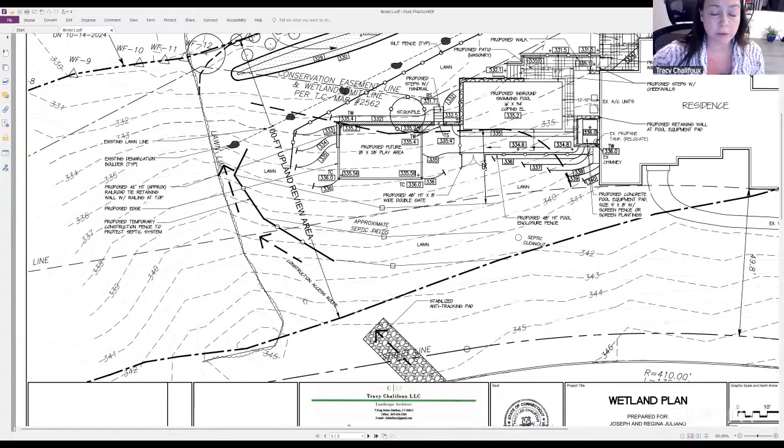The existing septic system is located here. The construction access route would be coming from the roadway along the east side of the property, avoiding the septic system and coming down and around to access the area.

There are no changes proposed to the existing driveway, the existing front walk, or the rear deck. I'd be happy to take any questions, or I could turn this over to Manny Silva if you have any engineering related questions about the stormwater management. Thank you.

Are there any questions from the commission before we go to the applicant's engineer? Through the chair. Well, go ahead, Greg. Thank you.

What do you know about what type of filtering system is going to be installed? Is there backwash? Where's the backwash go? That kind of stuff.

I actually don't have that information, but the homeowner, Mr. Juliano, may have that information, or we could get those answers to you. Yeah, we don't necessarily need it tonight, but we're going to need it resolved. Okay, thank you.

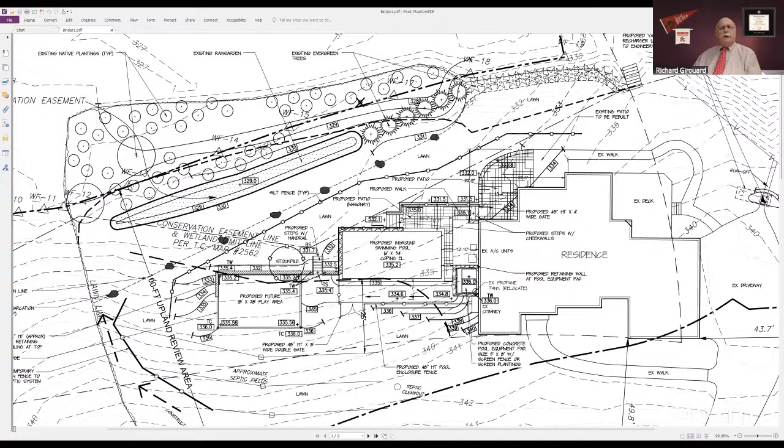All right, is there anyone else before we go to Mr. Silva? Through the chair. Go ahead, David. Is there additional planting that's going to be going in below the walls and stuff?

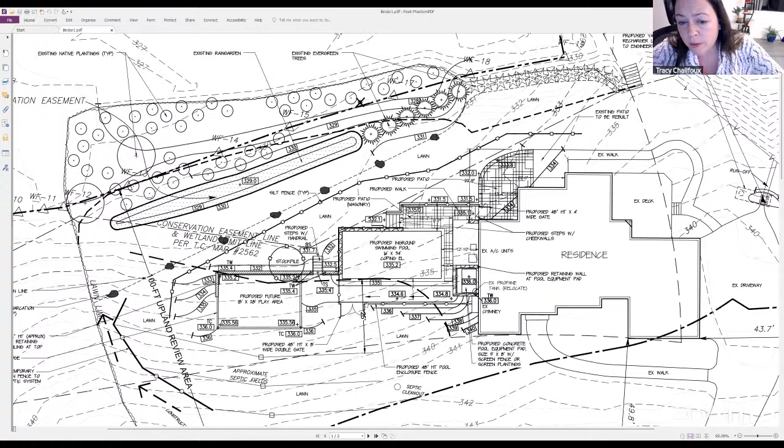There's no planting proposed on this site plan. However, I have had conversations with the homeowner about a desire for plantings surrounding the swimming pool environment. So we expect there would be a planting bed of upland or ornamental plantings, probably just below this retaining wall. We also discussed planting this northern slope to help hold the soil in place. Additionally, screen plantings between the roadway and the swimming pool environment are strongly desired by the homeowner.

Okay, we'd love to see what you have planned. Is there sufficient space for construction access around the end of the septic system? Yes, there is. In fact, this is the access that we've been utilizing throughout the wetland restoration process.

I just want to make sure that they're not going to say, oh, let's move these boulders out of the way and make life a lot easier. Yeah, there's ample space in between the boulders so they can maneuver the machinery around. Okay, thank you, thank you.

Through the chair. Go ahead, Rich. Just two things. First of all, I noticed that this application does involve a propane tank. And secondly, I wanted to know if there had been any discussion about monuments.

Didn't we discuss that in the last meeting? I guess my concern is that something's going to be changed that would change the monuments, especially considering there's a propane tank on site.

Are you talking about where the boulders are, Rich? Right. The monument—what we did there, if I'm correct, and Tracy or Mr. Silva can tell us, we asked that a 4x4 post be put there with the marker. Am I correct? That's what we asked for because there's no way to really put our markers on the boulders. Yeah, I think we were talking about 3 of them.

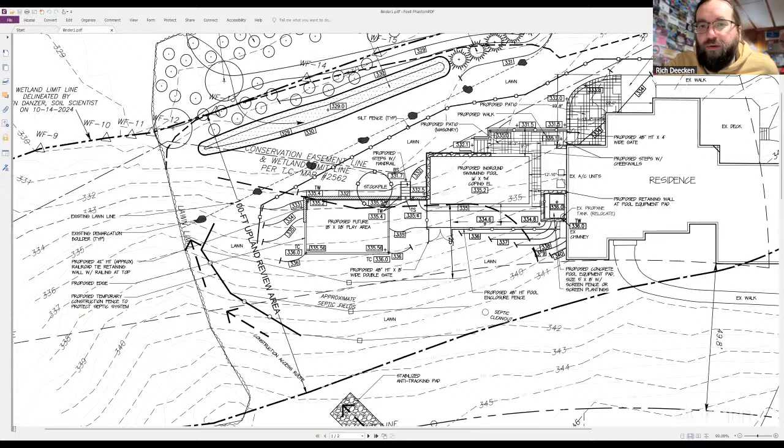Okay, because I did notice it at the bottom right corner of the home. Bottom—I think your mouse just disappeared. Oh, I'm sorry, I'm sorry, it would be the bottom left corner of the residence. I'm looking in the wrong place.

It says propane tank relocated. Sure, are they going to be putting it in that general vicinity? If we can, we'd like to keep it in this vicinity. Otherwise, we'll have to look at an alternative location.

Oh, that's great, it's completely out of the wetland. Yes, that's the intention. We do not want anything within the wetlands.

Okay, yeah, I just wanted to confirm that's where it was. That was a significant upgrade. All right, thank you.

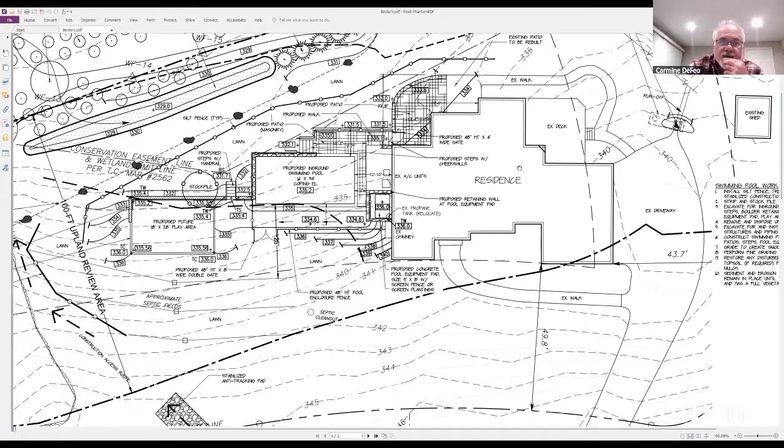Yes, please. The other question is, what drawing are you showing? The drawing I'm showing is a pool site plan dated September 19th, 2025. And the sheet number? SP1. That said, there's also an SP1 prepared by Rose Tiso that shows drainage information.

We don't have that updated. Mine is dated January 4th, 2025.

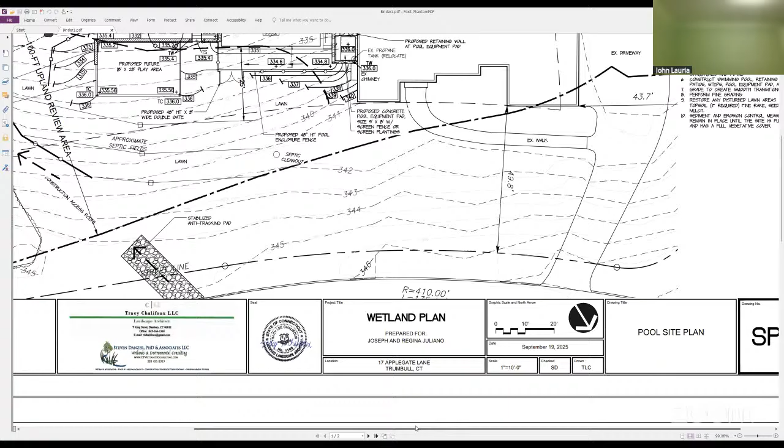I'd have to look at the submission. I'll take it back, there are some revisions. 9/23/25 is the latest revision on this. Okay, that makes sense, he's looking at the Rose Tiso plan.

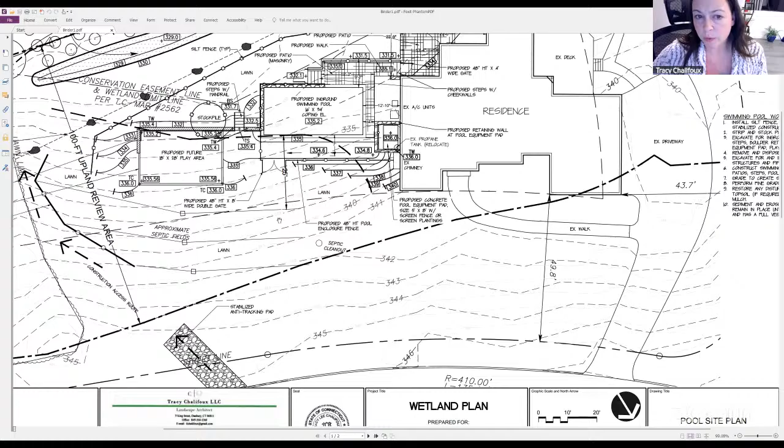So you're saying that one is the 9/23/25? Yes, I believe the Rose Tiso plan is. And that reflects this, the line work of this site plan is on the Rose Tiso plan. But the 9/23/25, if you're showing that, that's not the same drawing I have. That's correct, this is a different drawing.

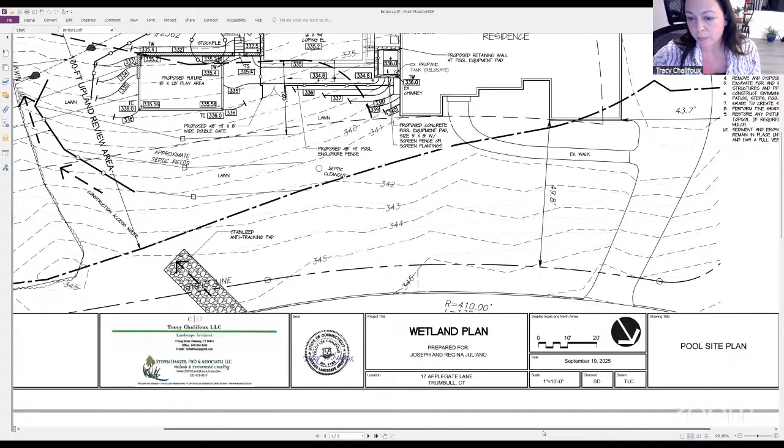This is the landscape drawing of the site plan. But you said that was SP1? Yes, they have the same sheet numbers, but one is prepared by Tracy Chalifoux LLC and the other is prepared by Rose Tiso. Well, we were not issued that pool site plan SP1. Yeah, we don't have it.

Manny Silva for the record, from Rose Tiso and Company, 35 Brentwood Avenue, Fairfield, Connecticut. The SP1 you're referencing from Rose Tiso has the pool and the play area, or at least it should. And I can bring that up if Tracy lets me bring it up.

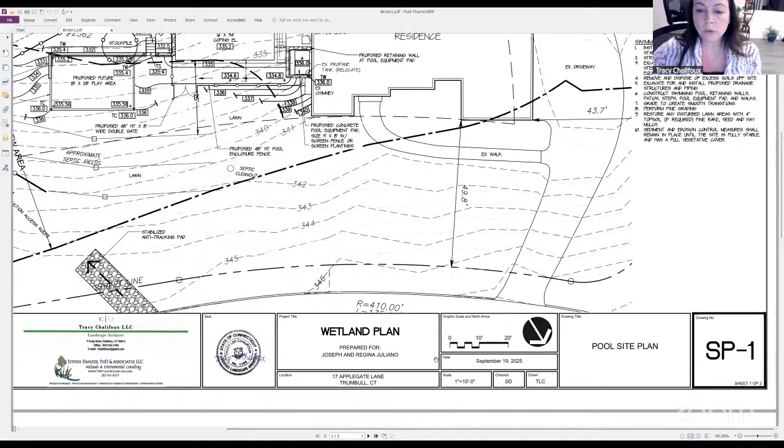Yes, and it's basically the same plan, Tracy's plan references my plan. But the SP1 I have shows a picket fence, and yours, the one that was just up, does not show a picket fence. So is the plan that you have looks like this, correct?

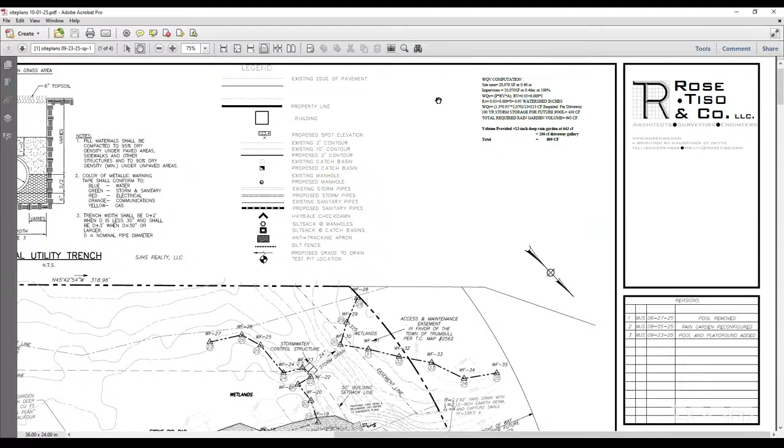It's Rose Tiso Company with the revision date. And you said there was a picket fence? Hold on, let's see. Yeah, right there to the right, behind the driveway. Right, that's an existing picket fence, it's not proposed. I think there is one there.

Okay, yep, but the drawing that she just had up, that she was referencing, did not show that, so I don't know what else is on that drawing that we can't see. Okay, what we can do is make sure that we coordinate this. I think this picket fence came up in the survey.

And that's an existing feature, but we can make sure everything is coordinated, although she should have the picket fence, maybe it's just frozen out or something. Is that correct, Tracy? That's correct, it's graphically indicated and it's in the survey, it is an existing picket fence. So the picket fence is an existing feature that hasn't changed.

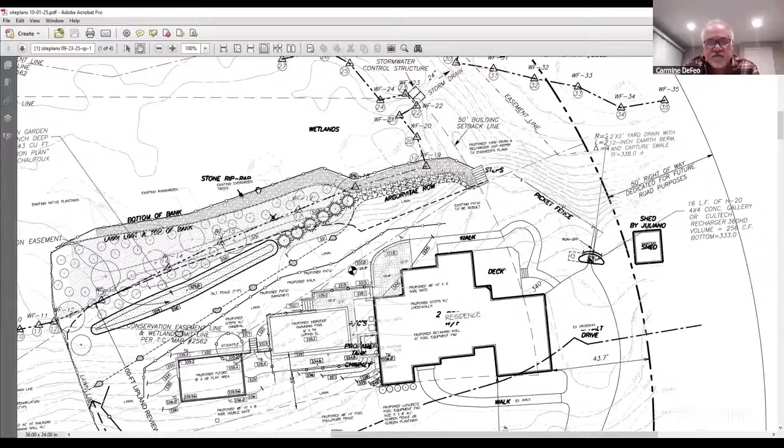I don't know if the commission would like, I could continue on with what I wanted to present. That's the only thing I've got right now, I don't know what else might be different between these drawings. You're asking us to approve something that we're looking at versus what you're presenting, that's a conflict. Tracy, can you share again and point it out if it's on your plan? Sure, thank you, because the drawings are from the same CAD base, so they should be coordinated.

Through the chair, go ahead David. Which of these plans, they're both labeled SP1, which one is the official site plan? Because one of them needs to be the official site plan. I would say Tracy's is, mine is just a support plan for the engineering piece, which is the drainage.

Right, so one of them should be labeled SP1 for the site plan, and one of them should be named something else. I don't know, maybe SE1 for site engineering, or DE or D1 for drainage one or something like that. But typically, one needs to be the site plan and one needs to be something other than that, because there should only be one official site plan.

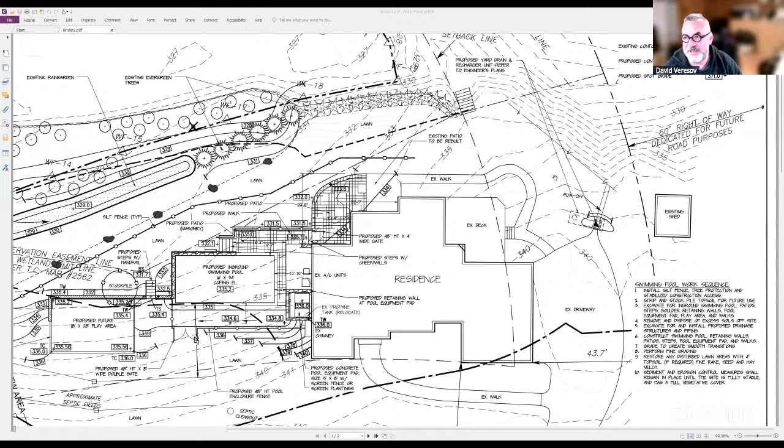Does that make sense? Yes, noted. We'll take care of that. Thank you.

Okay, if you can all see the plan, this is the picket fence here, the existing picket fence. So you can just make a notation on it that that's what it's showing? Yes, absolutely. Thank you.

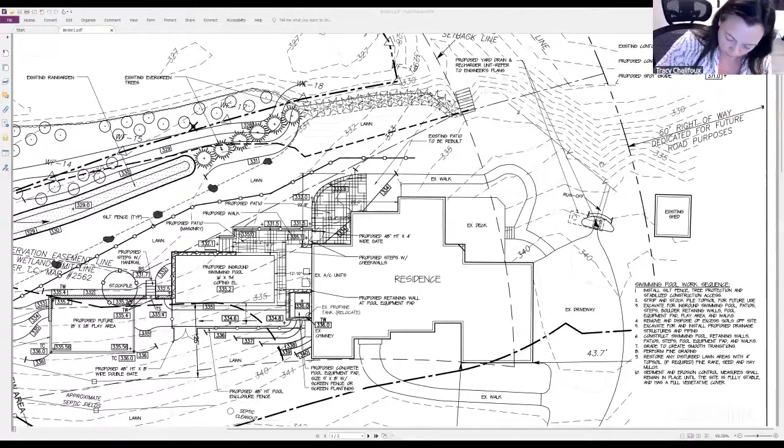All right, Mr. Silva, do you want to do your spiel, as they say? Yes, sir. All right, let's see if I could share here.

As the commission knows, the project has gone through its first phase, which was the remediation of the activity that had previously occurred on site. Just to refresh your memory, we designed and sized this rain garden for the eventual proposal that you have in front of you today.

This rain garden was sized for the coping around the pool itself and the pool development, and then the playground area, which was an addition to that original proposal, is a pervious surface, so there wasn't much consideration for sizing due to the play area since it will be pervious.

In addition to this mitigation area where we constructed the rain garden, we were also asked to store and treat the water quality volume of the existing driveway that was on the site. The driveway itself was not a violation, but as an additional mitigative implement, we've added this underground gallery system to treat the water coming off that existing driveway.

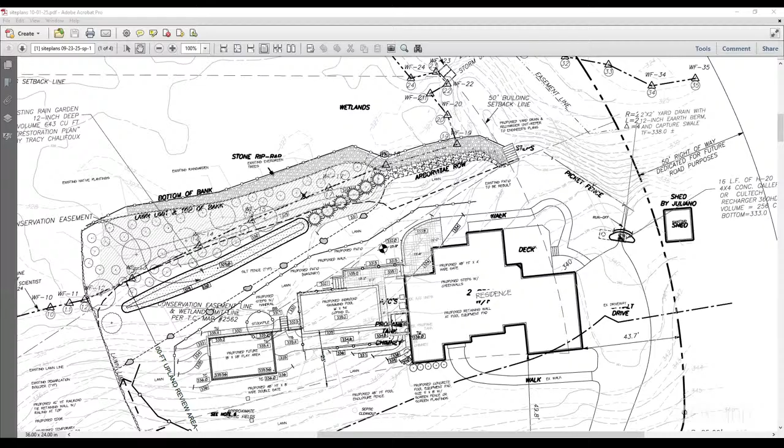Can you actually put the arrow on it? Because I don't see any red. Hold on, I don't see anything, I'll mark it. Still, we're seeing black and white. Sorry, I'm sorry, it was in the CAD drawing, I thought I switched over. So it's right here, I'll actually make it red.

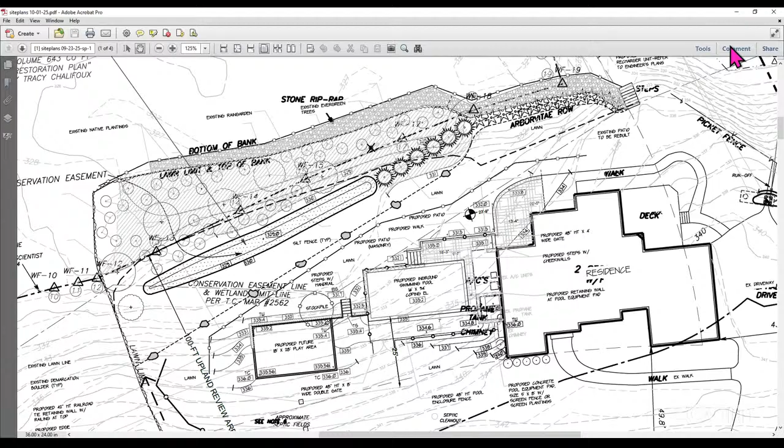Hold on, and can it be labeled? Yeah, I'll label it. I think it's labeled in the legend, but I'll have it labeled directly onto the line. It's right here. So that's our delineation line, or limit of disturbance and the silt fence line for this phase of the project. Let me just see if there's a legend here.

Can you make sure that goes onto Tracy's drawing also? Yeah, I will, we'll make sure that we coordinate that. I believe it was, but I could be wrong, but we'll ensure that it's coordinated. Thank you. It is on the site plan that I prepared, and actually it is labeled here. If you just look immediately below the rain garden, you'll see the silt fence typical label.

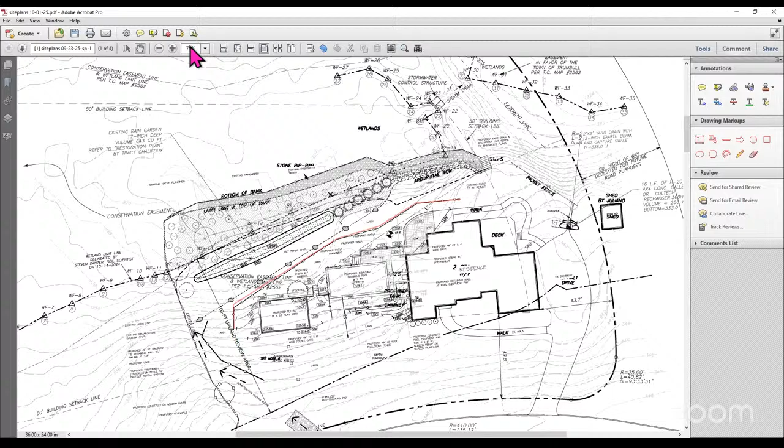Just a little bit up. Oh, right there, yeah, I see it. Yep, thank you. Through the chair, right there. Are you done Carmine? Yes. Okay, go ahead John. Yeah, a question about the play area.

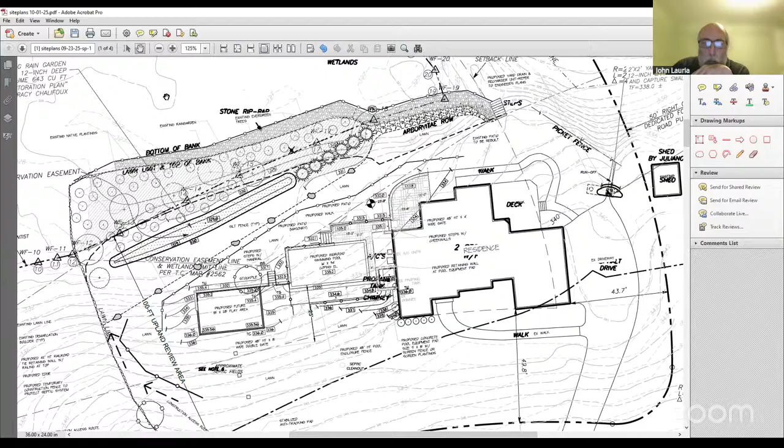Is that a pervious surface or an impervious surface? This is the future play area that's being proposed. So we told the owner that's what we're proposing is a pervious surface. It cannot be an impervious surface. So it has to be some kind of mulch, or I think they call it some kind of safe and play material that allows rainwater to go through it and percolate into the ground. It cannot be an impervious surface.

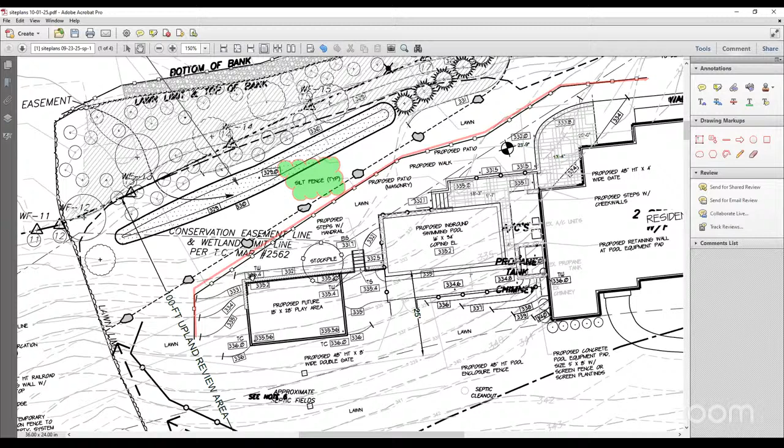Putting swing sets there, or are we talking about a pickleball court? No, it's like swing sets, something like that. Did we really even need an inland wetlands permit for doing something like that? That's a good question, it is just kind of a railroad tie box with some pervious material in it, but we are going to regrade it a little bit along the edges. Okay, so that's why we have it in the application. As long as it's pervious. Thank you. Anyone else from the commission?

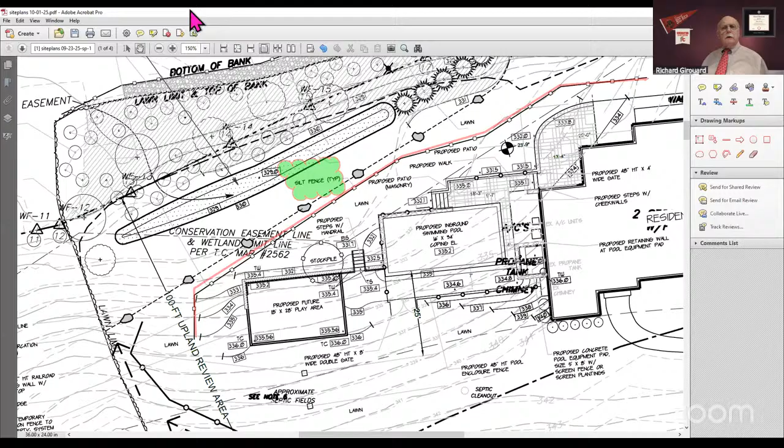All right, we're good. All right, are there no other comments, questions?

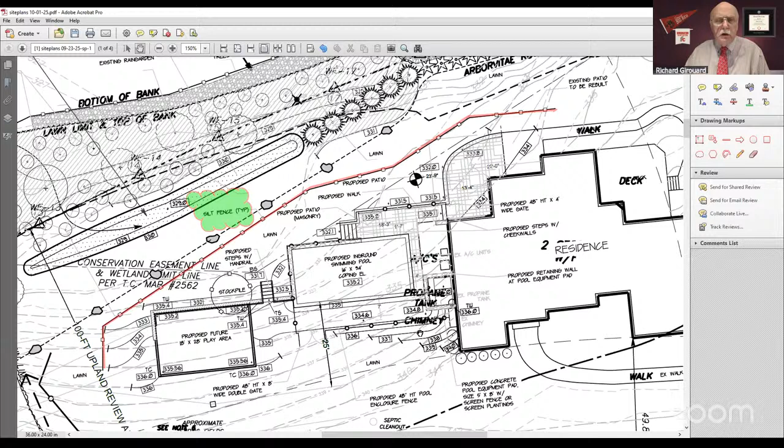One issue we're going to have - we would normally be walking this, but you might have noticed we have a little bit of snow on the ground. Normally I would make this walk the 16th or 23rd of February, and I don't see you being able to stake out the four corners of the pool or play area. So what I'm going to say is we'll make it the 23rd. If there's still snow, we'll have to continue the walk to sometime in March, just so you're aware of it. All right?

Yes, thank you. All right. Okay, I need a motion to close new business. Motion by Greg, seconded by Bob Ferrigno. All in favor? Aye. Okay, it's unanimous. Thank you very much.

Quick question - we expect when we go on the walk that those four corners for the play area and the pool will already be in place, right? Yep, so the applicant knows that. Okay, thank you. Like I said, if it turns out to be an issue, then we'll walk it in March, pending the snow removal.

All right, we're going to old business, application 25-31, Henry Pan. Permit approval for change of grade, plantings and removal of debris within a regulated area at 207 Tashua Road. I understand that the applicant has hired an attorney, and at this point I'm going to ask our town attorney, Attorney Cordone, to explain - I understand they want to do a withdrawal. So if you would, Counselor?

Sure, Mr. Chairman. An attorney, Nathaniel Ship, has told the commission, or Tatiana, our wetlands agent, that he's now representing the client as of today. In discussing the application with the wetlands agent and the chairman, we received a report from the Southwest Conservation District, which recommended third-party review of the soils by soil scientists, and also perhaps an environmental review.

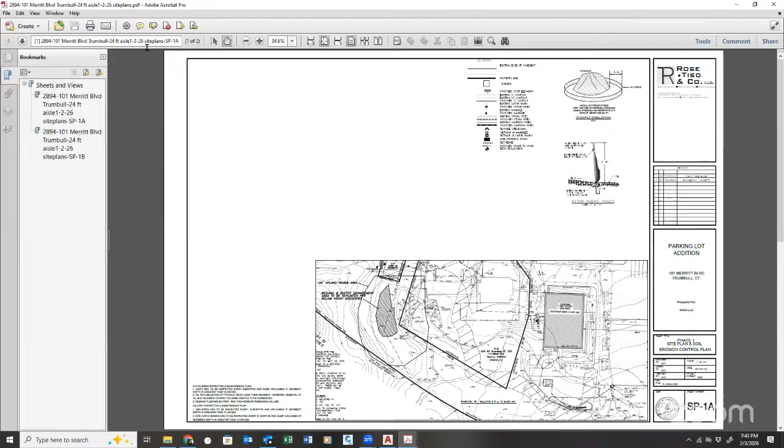Mr. Silva, if you would. Good evening, Manny Silva from Rose Tiso and Company, 35 Brentwood Avenue, Fairfield, Connecticut, representing the applicant. As the commission has seen before, the intent of the project is to create additional spaces.

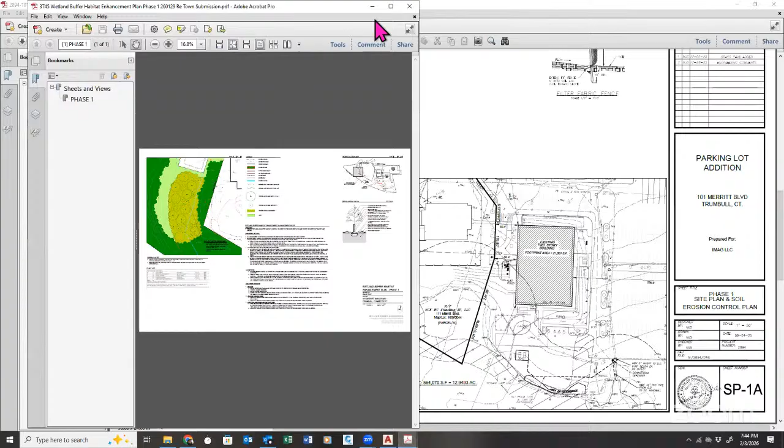Phase 1 will be the remediation of the area that was cut in the upland review area. We have prepared a planting plan by Bill Kenny to replant the trees cut within that upland review area behind the town's pump station. The trees that were cut down were mostly tree of heaven, which are invasive in Connecticut, and there were some black cherries, so we replaced the black cherries. We have some red maples, some aspen, and some elm trees. The owner, without a permit, removed the invasive trees and some others within the upland review area, but now is replanting with all native trees that are native to Connecticut.

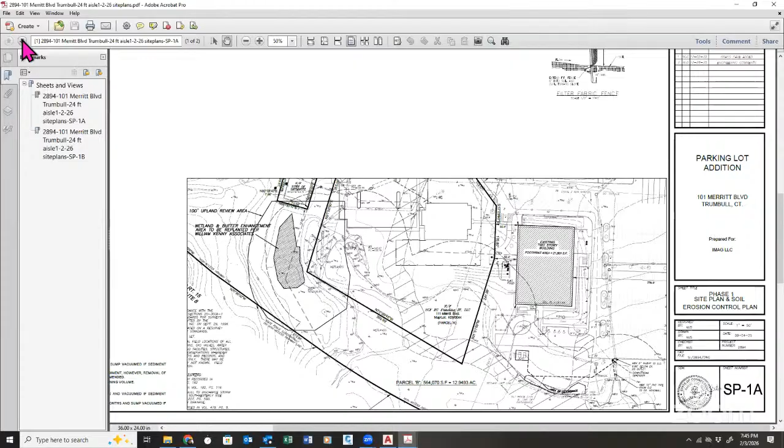Phase 2 will be the construction of a grass pave area, which is a stabilized grass area, for deferred parking spaces adjacent to the office building, where there's currently a parking lot. One thing requested by engineering to mitigate the intensification of the use, changing from a regular parking field to tractor trailer parking, is to add an oil water separator, a downstream defender in this case.

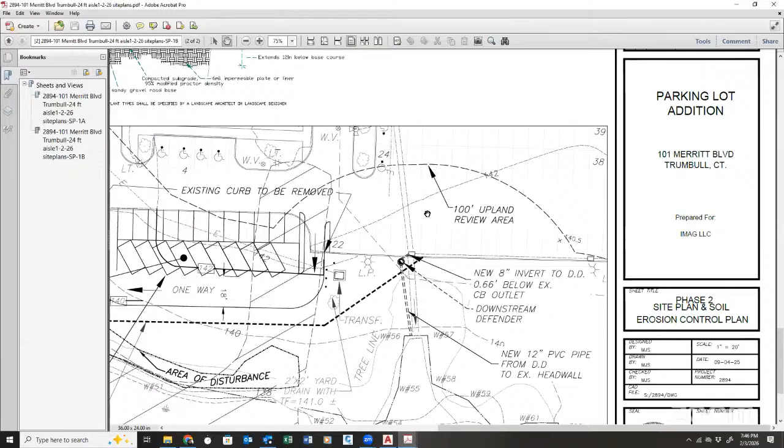We added an offline unit which will treat the stormwater coming from the existing parking lot, treating it in this swirl concentrator by slowing it down and separating out any suspended solids and floatables within the unit, then going into the existing outfall or headwall where the current pipe discharges today. After the storm event continues, you start getting clean water coming through the system. After 2 CFS, this downstream defender will bypass through the higher pipe, the existing pipe that comes out to the wetland area. Therefore, the water coming off the parking lot will be treated - that first flush will be collected and treated, increasing the water quality of the wetland area from the existing condition today.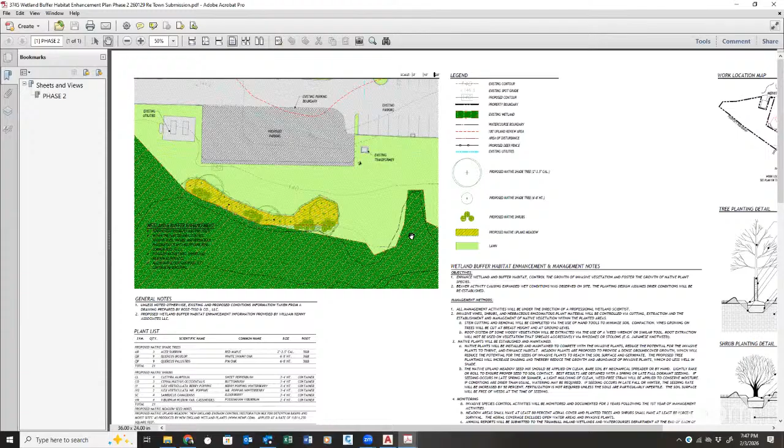The phase 2 planting plan has also been prepared by William Kenny and Associates. Here's that grass pave area, which is a pervious surface - not impervious - and it's deferred parking. Hopefully zoning will not even require it, but in case they do, we'll have this grass area that's stabilized. We will have additional plantings between this new parking area and the wetland area. I believe that was everything the commission and staff had asked us to do, and hopefully you agree. Thank you.

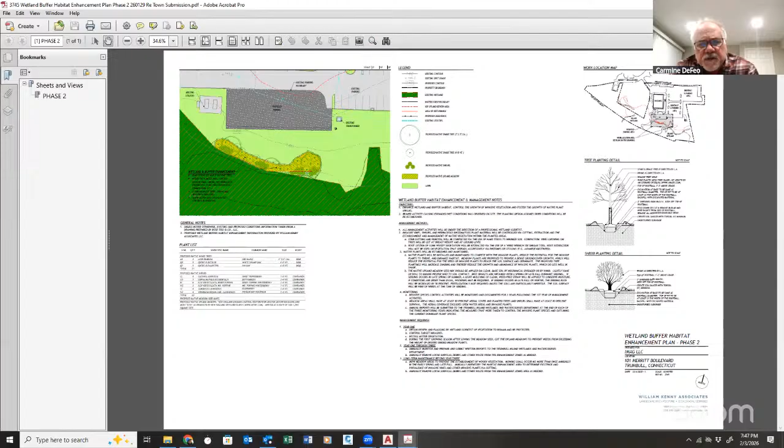All right, questions from the commission? Through the chair, go ahead, Carmine. On that separator that you're proposing to the right of the new parking spots, I'm a little confused.

You're saying that after the volume velocity increases above 2 cubic feet per second, it bypasses the separator, the defender? Yes. So what we're doing is adding the downstream defender and setting its invert 8 inches below the existing inverts of the pipes that go through right now. Right now there are 2 pipes that come in and 1 goes out, all at the same elevation. So we're setting the downstream defender 8 inches below that, so the water goes into the downstream defender first. The capacity of an 8-inch pipe at full flow is about 2 cubic feet per second, and I did the calculation.

The first inch of rainfall, or the 1.3 inch of rainfall on the existing parking lot, is something less than 1 CFS - about 0.6, if my memory serves. So the 2 CFS actually exceeds the water quality volume for the parking lot that we're treating.

Say you have a 24-hour rain event, a 25-year storm, and it's going to rain 5 inches on the parking lot. That first inch, the first flush, the dirty water, will go through the downstream defender and get collected. But as the storm continues and keeps washing the pavement, that's just clean water coming off now, because the oils and grit have already been washed off. That will then, once it exceeds 2 CFS, start bypassing to the original pipe that went out to the wetland area.

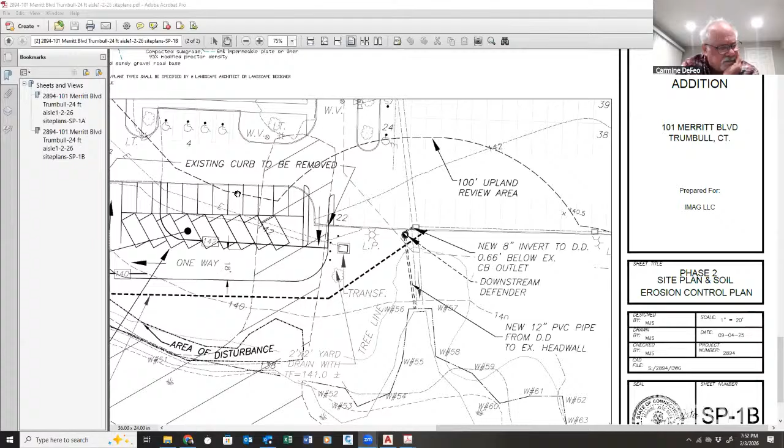Even though that parking lot is the size that it is - thousands of square feet - yeah, I actually gave a calculation. Your engineering partner asked me to quantify it, and I sent them that answer. Again, from my recollection of that calculation, it was less than 1 CFS, and the system can actually treat double that, or 2 CFS.

Thank you. It just doesn't... no, we definitely thought about it. And your Tatiana, to her credit, she thought of it also, and she made me put the numbers to it. So that's what we did. Okay, thank you. Through the chair.

Good. John, let's ask another question about the downstream defender - is that like a swirl concentrator that we've got going on here? Yes, exactly.

The downstream defender is a unit where the inlet pipe comes in tangent to the structure, which is a round structure, and it makes the water swirl around a siphon hood that's inside of it, causing little vortices - like little tornadoes inside. If you can imagine a whirlpool in a pool when you're a kid, all the garbage goes into the middle, right? All the stuff at the bottom goes right into the middle - that's basically what this does, except it happens in many little vortices around the ring of the structure.

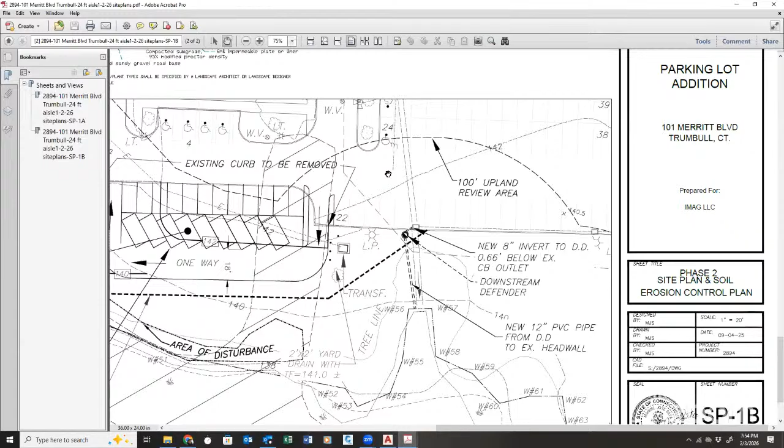And then also, because it has that siphon hood in the middle, the water has to go into those little vortices, go down to almost underneath that hood, and then up the center column. That stops any kind of floating oils or garbage, and it gets trapped in the outer ring, so any oil, grease, trash, paper, plastics, gets caught in it, and does not go downstream into the wetlands.

So you said it gets caught in it. Is there a sump that this material gets eventually dumped into, or is it clogged around inside the concentrator? And how do you maintain it? Will there be a maintenance manual and maintenance requirements for this?

Yes, there will be a maintenance manual filed on the land records, as typical with this.

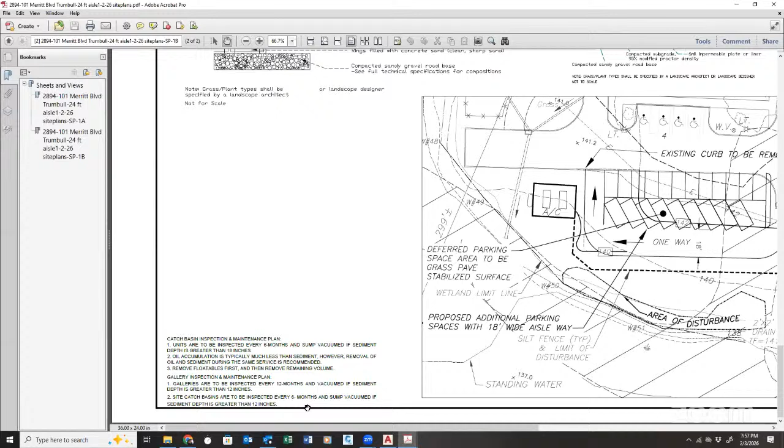As per the engineering requirements, we'll have a maintenance and operation and maintenance plan that the owner will sign and then file on the land records also, and they'll be required to have logs on site to make sure that the maintenance is completed.

Okay, one other question now, a different one. My original question was this area of disturbance where we're going to do some mitigation. Are we still having a beaver issue there? And will that mitigation really be underwater, or is that still up on solid land there?

My understanding is that the owner has already engaged a volunteer group that takes care of beavers, and they're going to put a dam bypass in. It's a cage area that they put in the wetland area, that has a pipe in it, so the beavers can't plug up the inlet of it, and they can control the water level that way, bypassing the beaver dam with the bypass pipe.

The reasoning, from what they told me, is that if you destroy the beaver dam, they'll just rebuild it. And trapping the beavers and relocating them is a temporary solution because where those beavers came from, others will come from. In this case, it's most likely Roosevelt Forest in Stratford. They come up river or up the creek there.

So what they do is they've gone to a measure of basically controlling the water level by having a submerged pipe that's in a cage, and then that goes over their dam, and downstream of their dam is where the water gets discharged. That helps control the flooding that the beavers will create.

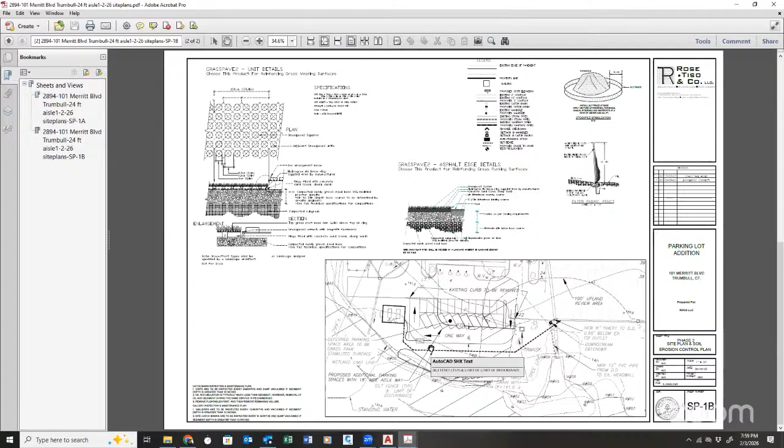Okay, thank you. For the record, John, when we were out there, we noticed the water level was down quite a bit. Okay, because they've installed pipes and different things. So, okay, other commissioners? Go ahead, Carmine.

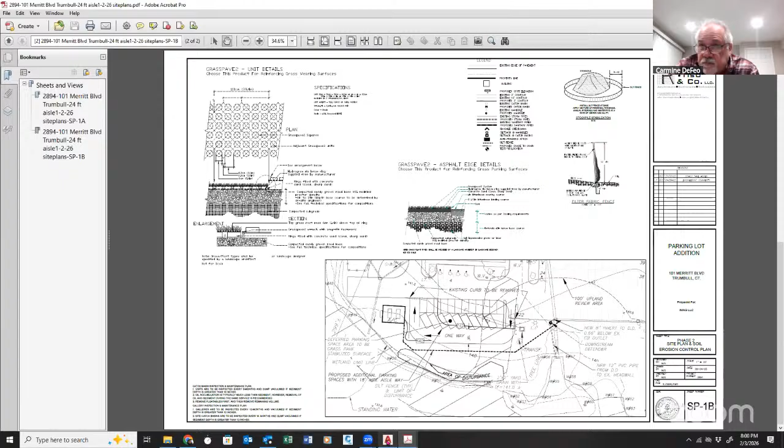In the remediation area, is there enough room between those stumps to plant those trees, or do any of those stumps have to be removed?

If the stumps themselves are not large... I believe the trees that were cut down were not that old, due to the city installing the sewer line to the pump station, not that long ago, and probably had to clear that for maintenance. The majority of the gauges were pretty small. There were a couple that were larger, but it shouldn't be an issue to replant. Again, it was a lot of tree of heaven, which are small gauge to begin with, and the lantern flies were going to town on their stumps. So I don't believe there'll be an issue planting the new trees with the stumps in place.

Thank you. All right, David Verespi, have you had a chance to peruse that? Yes, I looked at the planting. Everything looks in good order. Bill Kenny does an excellent job with the plantings.

All right, so if this were to go to a vote, you'd be comfortable with it? Same thing with Bob Ferrigno, are both of you comfortable then? Yes, I'm comfortable, Mr. Chairman. All right, good. Bob, you had a question?

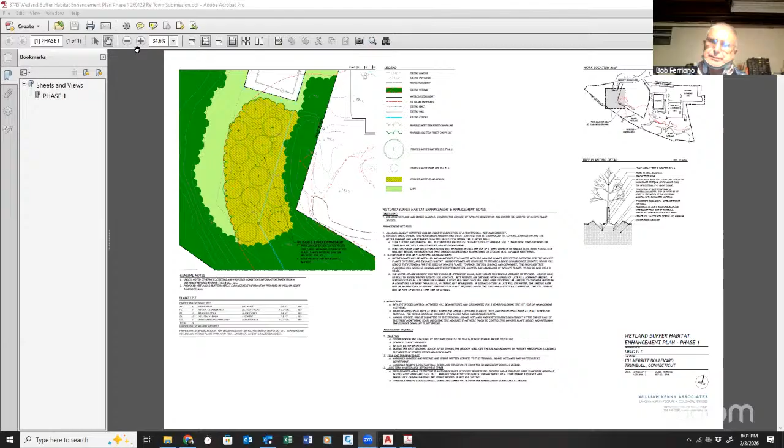Yeah, can I have comments from Tatiana and John on these two projects? Yes, through the chair, Tatiana. We have reviewed the water quality structure and had some back and forth with an engineer, so we are satisfied with what's been submitted.

On both the projects? Well, the first phase is really remediation, more replanting, which is outside of my expertise. The water quality structure and second phase is just an add-on parking area. Thank you. All right, any other questions or comments from any of the commissioners?

All right, in that case, Greg? Yep, to make a motion to approve as submitted. I'd like to make a motion to approve application 2535, IMAG LLC, permanent approval for additional 24 paved parking spaces within a regulated area at 101 Merritt Boulevard, in accordance with the following conditions from the Town of Trumbull Inland Wetlands and Watercourse Commission.

Section 1, general conditions 1.1 to 1.10. Section 2, site-specific conditions of approval 2.9: all new plantings in phase 1 shall have a survivability period of 1 year minimum, or as determined by the town engineer. Section 3, additional conditions. Phase 1: replant the area behind the town pumping station where 59 trees were cut down. This phase 1 needs to be completed before phase 2 can start.

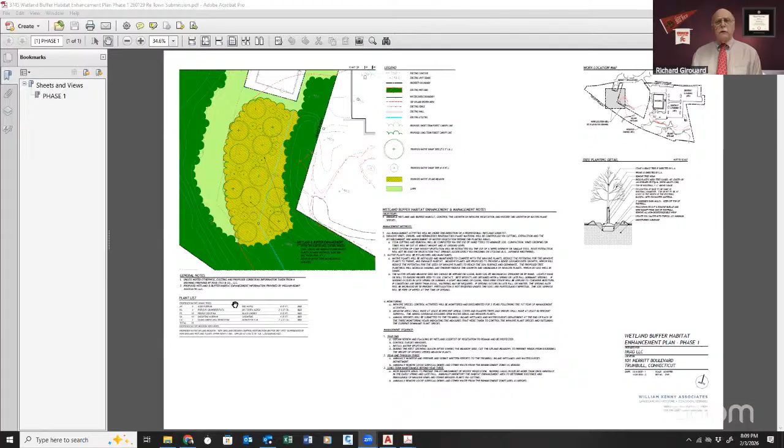Somebody seconded it? Okay, as I said, there is a motion and Rich is seconding it. Oh no, I'm just asking if someone had seconded it. Oh, well who wishes to second? I'll second it. Okay, Bob Ferriano has seconded. Let's bring it to a vote. If we can get the plan off of the screen, it would help, so I can see. Thank you.

All right, I'm a yes. Carmine? I'm still deciding. All right, Greg? Yes. David? I'm a no on this, I think it should be 2 separate applications.

Mr. Chairman, maybe we should have a discussion for a moment on the application. We normally go into a work session and we seem to have just rushed into this right after it was presented. So this first application again has significant flaws, but that's a separate point. I think the 2 application process would make it a lot smoother for everybody, smoother for the applicant, smoother for Tatiana. There's multiple phases to this, it doesn't make sense to hold them up on moving to phase 2 when phase 1 is easy. Oh, the problem is phase one was actually the second part. The original application was for the parking area. Yeah.

And then they kind of just not ignored, but they didn't really address the issue of the cut trees. Correct. So now the way it's gone, it is kind of flip-flopped where we're now addressing the trees and that's going to follow.

Go ahead, Attorney Cordone. Yeah, Mr. Chairman, if I may, I think first of all, Tatiana does a phenomenal job and is very conscientious of the role of the commission on all applications. So I just want to be very clear about that. And I think this application is no different.